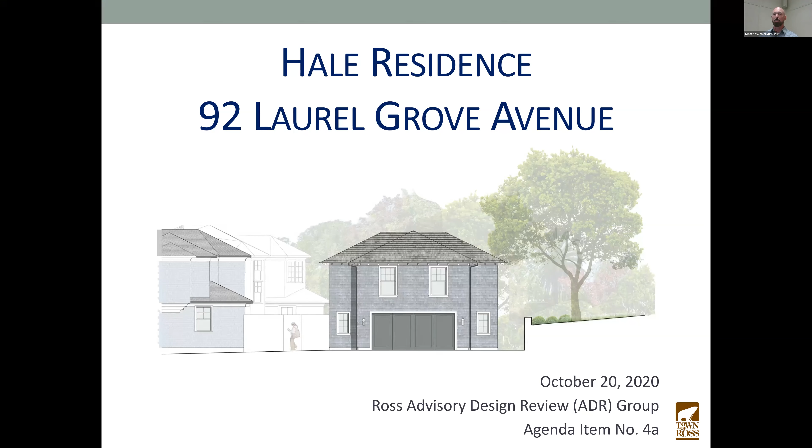The lot size is just over an acre in gross area. It should be noted that there is a road easement that occupies a portion of the western part of the property, so the developable area of the property is actually a little less than an acre. Also, one would note that there is a stream located along Laurel Grove Avenue, and so there are appropriate setbacks on the property for development from that stream.

Project history: in 1997, based on the town's records, a variance and design review was issued to make alterations and additions to the existing residence. And in 1998, an amendment to that project was approved.

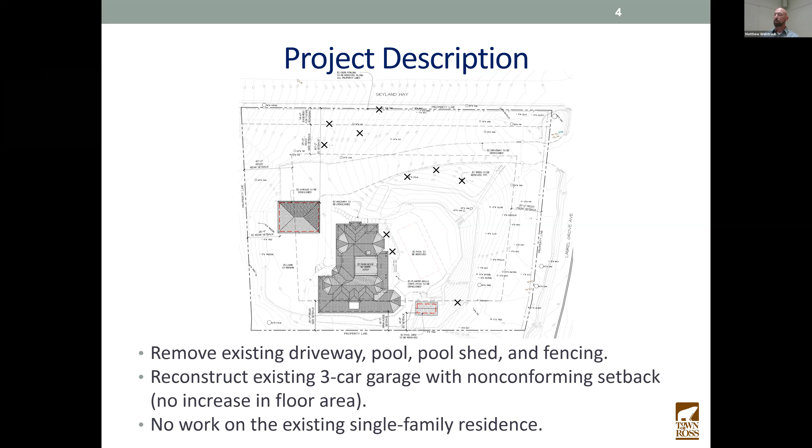The current project description, here we see the property with Laurel Grove Avenue on the right side and Skyland Way on the top. The current project preliminary activities would involve removing the existing driveway, the existing pool and pool shed, and the perimeter fencing around the property. Also, the project would reconstruct the existing 3-car garage, which has an existing non-conforming setback. There would be no work on the existing single-family residence.

The other major components of the project would be to construct a new 1-story, 800 square foot accessory dwelling unit along Skyland Way, occupying area that was the existing driveway. Also to construct a new 2nd-story ADU above the reconstructed 3-car garage, maintaining the existing non-conforming setback.

I should mention the setback for ADU number 2 is approximately 24 feet from the edge of the existing roadway, and about 18 feet from the edge of the property line. However, it would be about 4 feet from the road easement that is on the property, which currently has no plans to be developed.

What should the setback be on that side? The setback is 25 feet, side yard setback. The effective practical setback from the edge of roadway is actually 24 feet, so from the standpoint of physical distance to the roadway, it almost meets the minimum setback. The code, however, does require setbacks to be measured from the edge of easements, so technically this ADU would be located 4 feet from the edge of the easement line and within what would be considered the side setback.

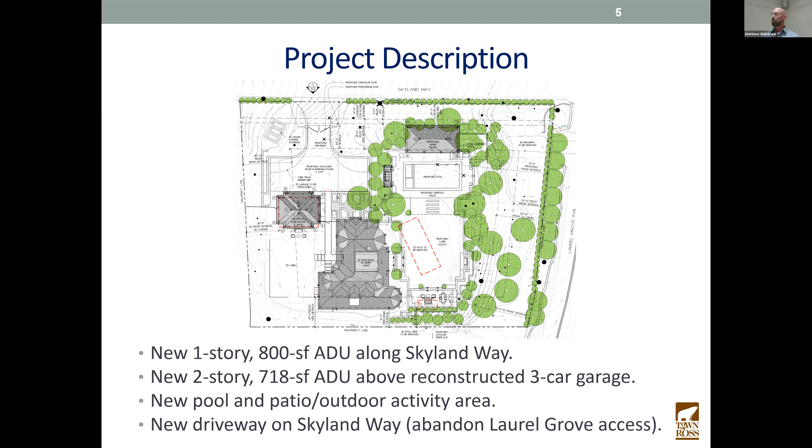Here are some representative building elevations for the garage and ADU on the left. The new garage door would accommodate 3 parking spots within that structure, and we see the entrances to the ADU here. The second ADU on the right side is a 1-story structure, but it should be noted it would be built on a grade, so it would actually exceed the maximum allowed building height of 16 feet.

So a variance would be requested to exceed the building height in approximately this location at the back of the building. Both ADUs would actually request exceptions for height.

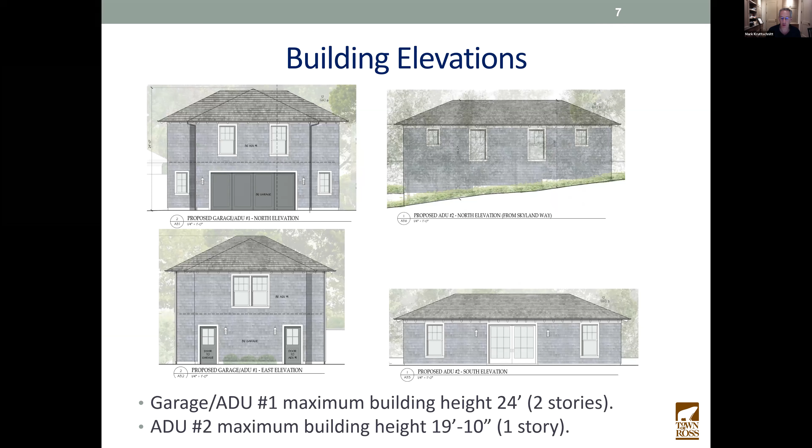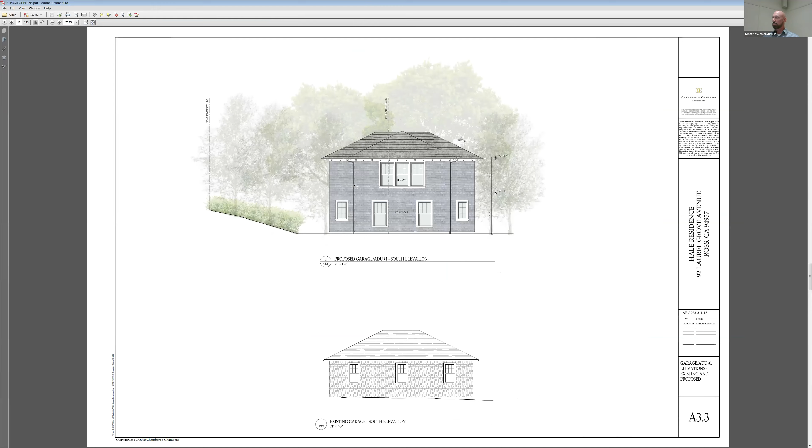Thank you, Matthew. Could you show us ADU number 2 from the east side? Sure, as you'd see it from Laurel Grove—since it's an uphill slope. Let me scroll through the plans. That one? No, the other one—it's the first one, because the pool's to the left when you see it from Laurel Grove. Go back to the last slide. That one, the east elevation. Yes, did you see the cut of the pool? Yes, that's from the interior of the property. Thank you, that's what I wanted to see.

Okay, we'll open it up now to the ADR members to ask questions of the applicants. I think before we hear from the applicant, I'd love to hear from Matthew about the findings for the variance from staff's perspective.

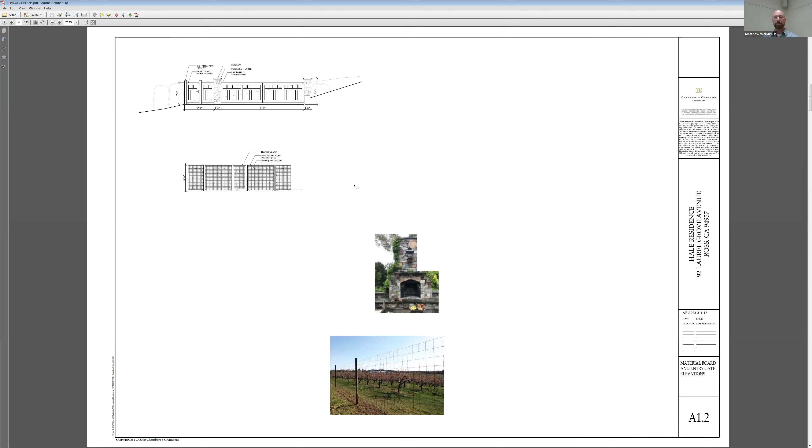Sure, I'd be happy to talk about preliminary findings. Staff has not developed full findings yet. There are actually two types of requests: ADU exceptions and variances. ADU exceptions are being requested to construct more than one, up to 2 ADUs on the property, and also to exceed the 16-foot one-story height limit for ADUs. The reasoning is that the property meets the minimum 1 acre lot size to be considered for more than one ADU, and construction of ADUs, and housing in general, is a priority for the town and the state of California. Those would be preliminary notes, not necessarily findings.

With regard to the variance request for the patio, one would note that the proposed patio is designed to align with the residence, so as not to be placed in an offset location where it might be awkward to leave the residence and go around a diagonal path to reach the patio. So from a design perspective, that would seem to be the reasoning.

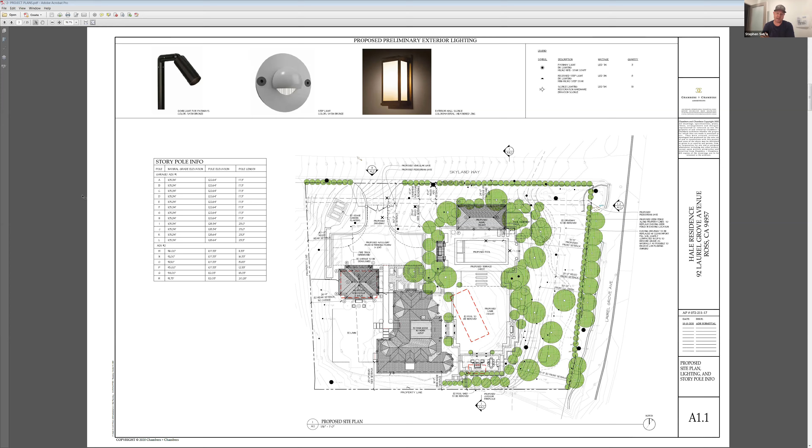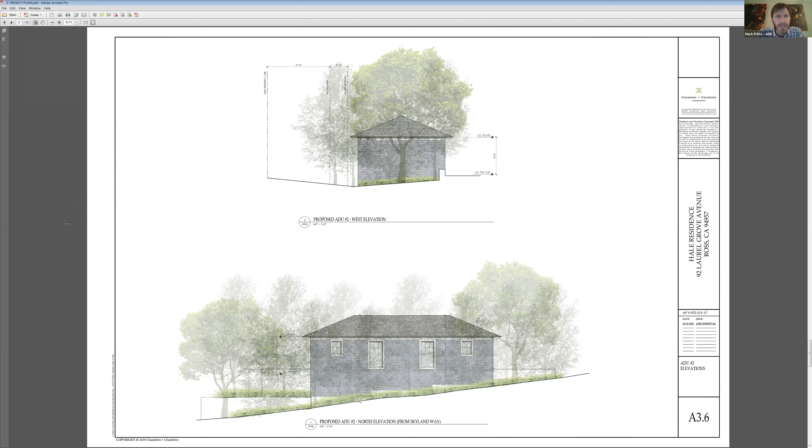I can jump in. I concur with the previous comments around the bulk and mass location of the ADU on the existing driveway. Pulling that in seems to be, you could wipe out a few variances all at once by doing that, and eliminating the presence of that unit so close to the road.

I would say the articulation used on the garage, I'm assuming you're knocking the garage down and rebuilding it as a 2-story. That articulation, some of that language, some of that character could be carried over to that other unit to articulate the backside, at least make it a bulk and mass that is broken down in scale a little more.

But I think scooting it back away from the road eliminates the need for a height variance, in addition to violating the setback variance with the easement.

I would say I am a fan of moving the drive. I think that's just to throw it out there as a support. I think the access from Skyland seems good. It's in concert with other driveways that are accessed as well. And then you eliminate such a long drive on the property. So I think that's a smart move, really, really nice.

And I think I get the symmetry and the location of that patio in what I would characterize as the south setback. I just think it's hard to make findings for something that is, on your almost an acre lot, putting a patio so close to the property line. It's just, it seems unnecessary.

I would have difficulty making findings for that, other than the symmetry, which I think there are probably a variety of ways to satisfy that from a building relationship to that patio. So pull that in, get that out of the setback. Again, it's a nice move architecturally, but I think it's unnecessary to have that variance included in that as well. I think the other comments I support from Mark and Joey.

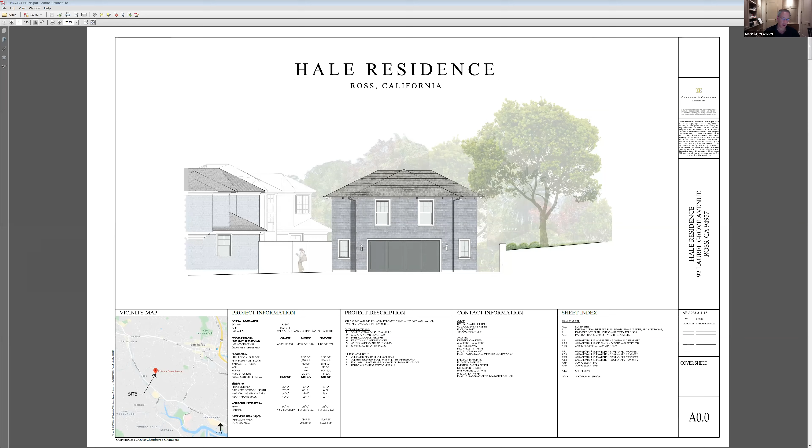Okay, thank you all. We will now move on to the Dickerson residence at 105 Bolinas Avenue.

Yes, thank you, Chair and ADR group members. Please give me just a moment to start my presentation. Apologize for the video gymnastics.

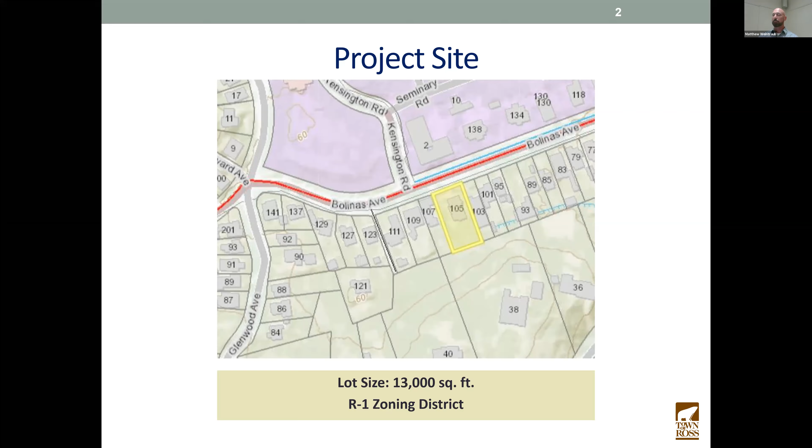The Dickerson residence is 105 Bolinas Avenue. The owners are Roger and Melissa Dickerson, and the applicant is Imprints Landscape Architecture. The property is 13,000 square feet in size, located on the south side of Bolinas Avenue in the R1 zoning district, relatively flat lot located out of the flood zone.

Project history: in 1998, the existing residence was constructed. In 1999 and 2000, there were alterations granted to that existing residence. And in 2001, a variance was issued to do landscape and hardscape work in the west side yard setback area.

That brings us to current day project description, which does involve the west side yard setback area, which is proposed now to receive a new combination pool and spa and associated patio. The pool, spa, and edge of hardscape would be located approximately 10 feet from the side property line. There would be new screening trees located along that side property line, as well as along the rear property line, where an existing hot tub is proposed to be removed as part of the project.

The project also includes a new pool equipment enclosure designed to match the existing wood fence, which is behind the front property line adjacent to the house. The pool enclosure would be located actually behind the fence, so it'd be screened from public view.

Colors and materials: quality hardscape and flagstone materials and plant materials are proposed, including large 24-inch screening trees. Public comments were received from Trevor Buck at 83 Bolinas Avenue, who is in support of the project. I'd also note that the applicant's neighborhood outreach description describes that Rich Petrello, the adjacent neighbor at 107 Bolinas Avenue, indicated he supported the project. So he would be the owner who's adjacent to the setback encroachment.

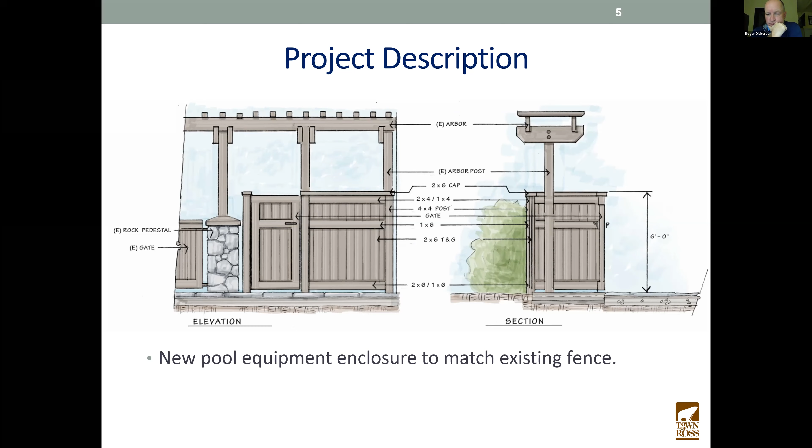Stephen, do you want to be the second person to give a yay or nay vote? Sure, I will say yes.

If you want a little more color on that, I think that these tight houses on Bolinas and parts of Poplar just don't conform by any stretch to kind of the setback standards in a way that really allows for enough patio function, enough pool function. I think it's appropriate to confine the house there, but I feel like the neighborhood kind of accepts the tight conditions and the noise that comes from family life. So I think whether you put it in the backyard, the side yard, everyone's going to hear it all the time anyway, kind of, you know.

I said yes to one on Poplar and everyone else said no and got mad at me, but I'm saying yes again. Okay, thank you, Stephen. Mark?

You're on mute, Mark. Yeah, that's why. I kind of side with Joey on this. I'm just not sure, I don't think it's an appropriate spot in this particular development. I know I would hate to lose some redwoods in that particular grove back there, but I think that might actually be a better solution for this particular project. It doesn't, when you walk in, it immediately feels like it's in an odd spot for this particular lot.

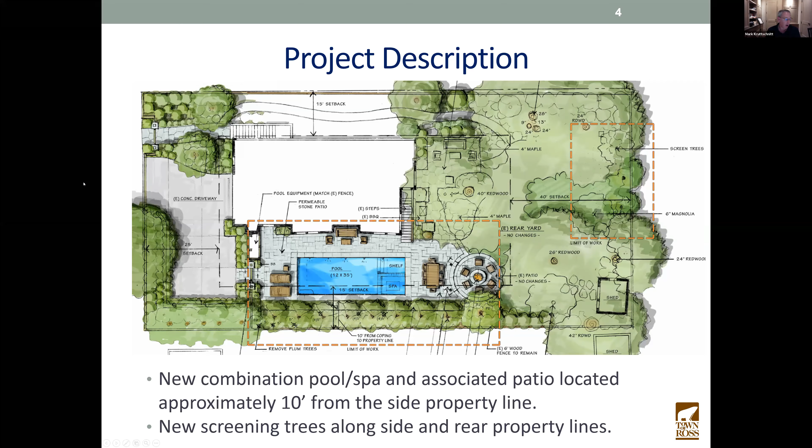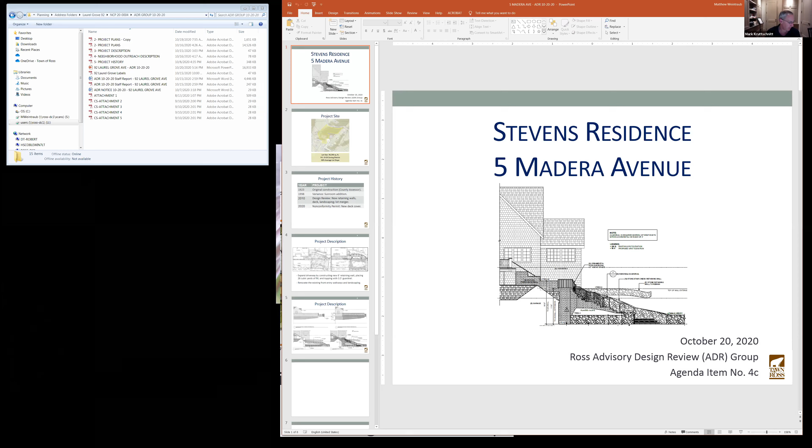Okay, 5 Madera Avenue, which we've already looked at before. This is just an addition or a change in the driveway to a house project that we approved relatively recently.

Yes, thank you, Chair Kruttschnitt, ADR group members. The project before you is the Stevens residence at 5 Madera Avenue. Yes, you did see the project at this location a few months ago. The project was a new deck cover over an existing deck. This project is related to the entry landscaping and hardscaping.

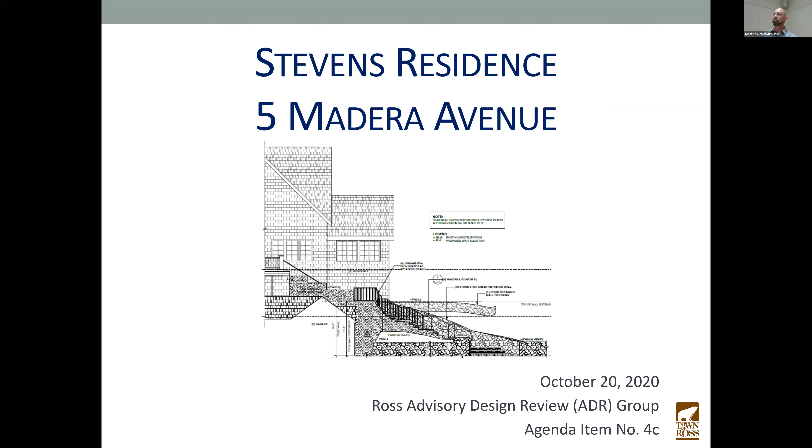The owners are Ann and Chuck Stevens, and the applicant is Peterson Associates. The project site is located between Baywood Avenue and Madera Avenue, an irregular shaped lot, a little less than an acre in size.

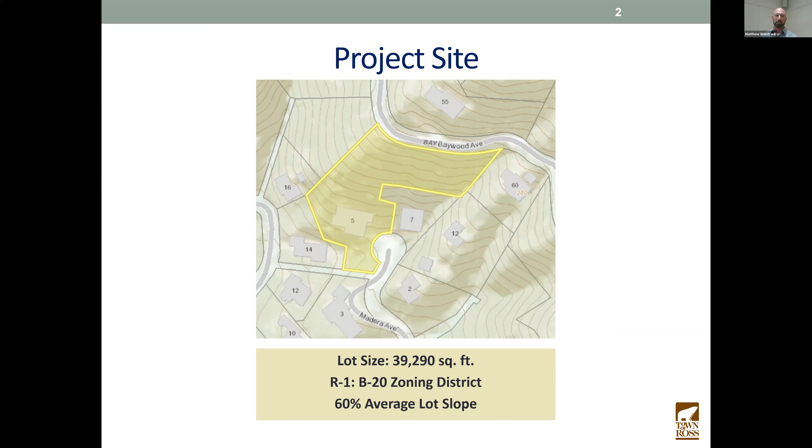The predominant characteristic is the 60% average lot slope, and the existing house is developed at the bottom of the slope. That's an existing condition the property owner is dealing with in their current plans to renovate the entry.

Project history: the original construction, according to the county assessor, was 1923. In 1998, a variance was issued for a sunroom addition. In 2010, some landscape work including a lot merger resulting in the existing irregular lot shape. And in 2020, just a few months ago, the nonconformity permit was issued and approved for the new deck cover.

The project description is shown here with the existing site plan on the left and the proposed site plan on the right. The proposal is to expand the existing driveway by constructing a new 6-foot retaining wall and placing 26 cubic yards of fill behind that retaining wall, then extending the driveway over the top, and topping it on the edge with a 3.5 foot guardrail.

In plan view, this is the existing edge of the driveway with a wall located here, and a small wood deck that extends out. The proposal is to remove the cantilevered wood deck and extend the paved driveway into this location shown on the right. This area is where the fill would be located, and the 6-foot retaining wall runs right along this edge.

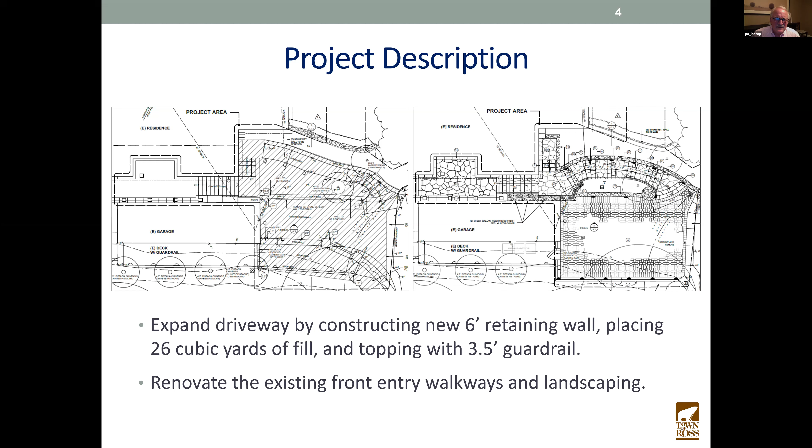So I guess my only thought was with that retaining wall, is that I understand there'll be some planting on it. Is that something that's visible from the neighbor's property at all? I would say you'd probably have to stand on a chair to see it, because that home is down in a pocket quite a bit below this. But no, we're planting it, so it will be softened.

Great. Okay. Yeah, I'm in support of all of the work. Thank you. So Matthew, we're unanimously in support of the proposal.

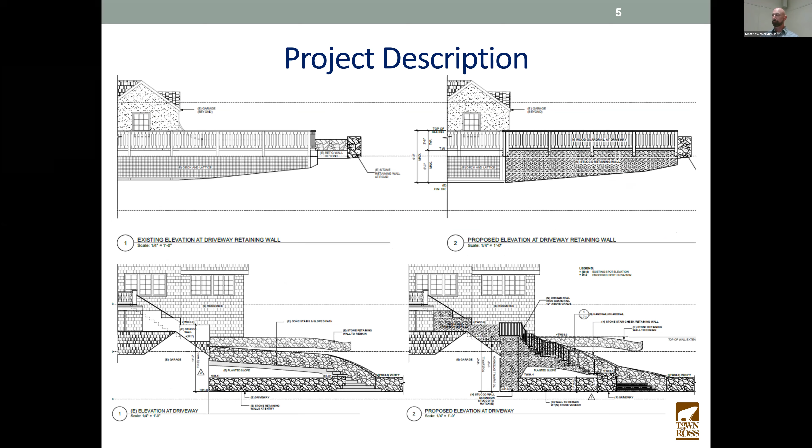Thank you. Great. Okay, now we will have a rare conceptual advisory design review of 3 Newell Road, the Murray and Jurek. Sorry, I'm not pronouncing that right. I pronounced it right one time though, I'm sure. Saying it both ways.

Brad, are you going to be presenting this? Well, I think... Or Ken, there you are. Hi, Ken. Sorry, I can't come up. I'm joining for fun. And Chair, if you don't mind, I'll just give a brief introduction on what conceptual design review is, and then I'll hand it over to the project team.

Essentially, this is not a project that we have a formal application for at this time. This is something that's been discussed with staff in concept, and the applicant would like to take advantage of the fact that we do have this advisory design body while they're early on and haven't invested too many resources into the design of the project yet, to bring the concept in front of this group. This is a workshop to gather feedback from the advisory design review group. So as opposed to making a recommendation or saying whether or not you'd support this moving forward to council, this is the opportunity to just apply your talents and skills to work with the applicant on making sure that this project, when it does come in for application to the town, is already on a good footing, and it's got the concepts of good design that you'll be looking for when you are making a decision on the project down the road.

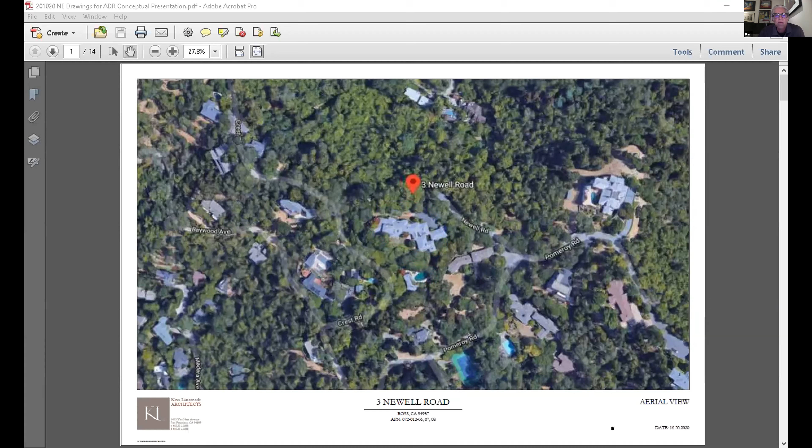Let's go to the next slide. It's this kind of low-slung, one-story house that meanders across the property. There's a plateau at the top of the ridge, with great views of Tam, surrounded by trees.

There's a feel to this place that my clients really love, and they want to retain the spirit of what's there. But the fact is, to try to remodel this place and bring it up to today's codes, oftentimes we just need to take these houses down if we can.

But we want to retain a lot of the site elements that are there. The pool house at the bottom of the property we want to keep. So the big thing I'd love for you guys to opine on is just how we're handling the site.

I'm not really going to go into architecture today since I don't have exterior elevations, but I feel the biggest part of this project is how do we site the property, how do we site the buildings, and what are our primary access points. So let's go to the next one.

This might not be easy, but let's see. This is Newell Road. There's a driveway that heads up to the north here, and this is where the cars park, right in this area. You're seeing the whole outline of the property there.

Right along the ridge, the house kind of occupies more of an east-west orientation. There's this oval pool down below and a pool house, and a really cool stone walkway that leads you down to the pool. There's a bit of lawn space here, and all the views to Tam are kind of that way.

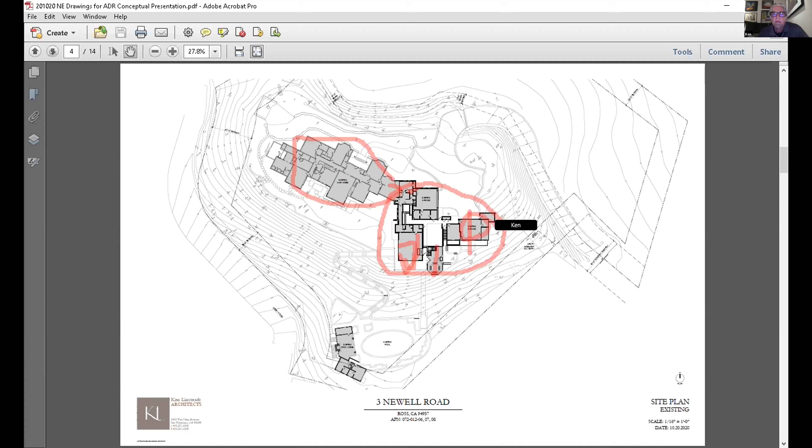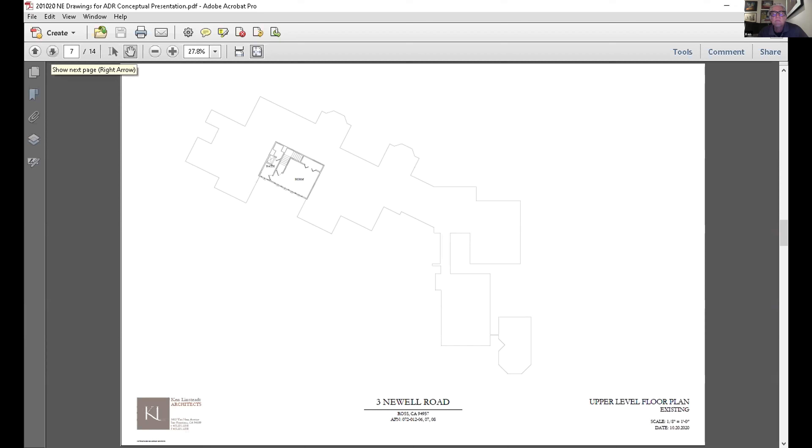Let's go to the next one. There is a second story that somebody added. Let's go back one more. Somebody added a second story to this existing one-story wing, probably back in the 70s or 80s.

So maybe can we zoom in a little bit, Jessica?

In red, we're showing the outline of the existing house. I'd say the big moves here are creating a drive court that you can actually turn a fire truck around in, because the current one doesn't accommodate one. So the shape of this arrival court is really all about what's going to accommodate the Hammerhead T. We brought out Rob Bastian from the fire department to take a look at this property, just to make sure we're doing the right things with fire. He had some recommendations we can go through, but this seemed like the right call.

We took the garage and pulled it over here to the east. So really we have a primary entry now straight on. This is a one-story structure fairly close to where the existing one-story structure is. And then we have a breezeway over here that leads to a two-story structure in this area, which is the bedroom wing.

So the big idea here was let's keep a low slung one-story gabled form essentially in the same spot that the current house is in, and then remove all of this and move it back, because at the north end of the property there's just a bunch of trees and it falls off quickly. So we thought, let's move this structure back and allow a big meadow garden space here that the clients would really love to have.

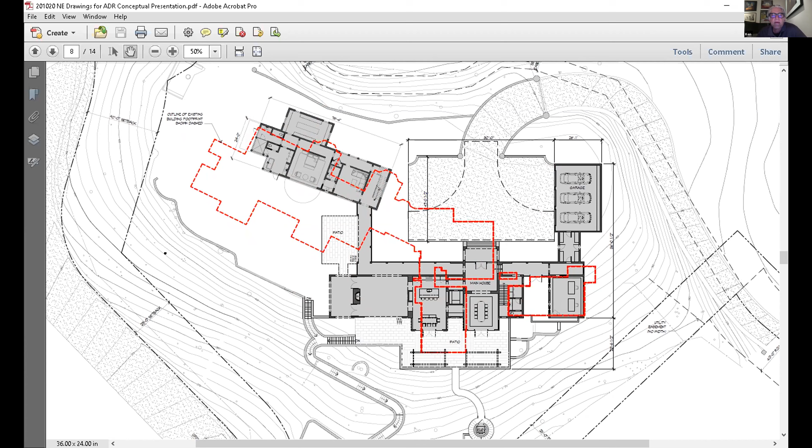Oops, is there a— let's see if we can find a downstairs of the existing.

Yeah, so basically we've created this big deck off of the back of the main structure. And this is where we're getting some downstairs space, which is going to be kind of a rec room and a gym. So we're stepping down the hill.

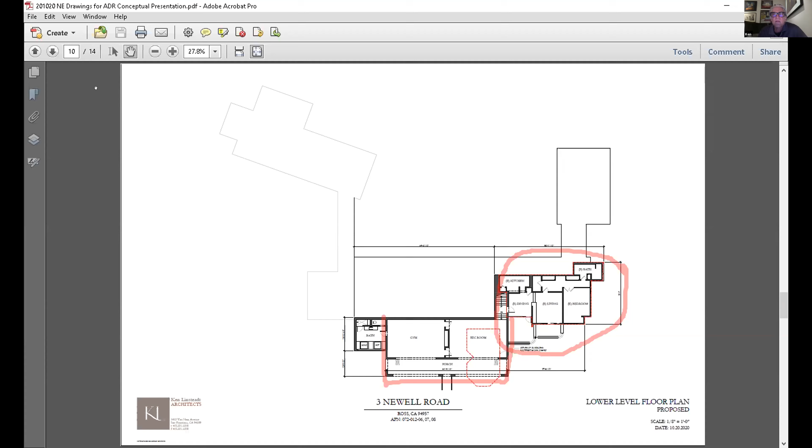And I thought it would be kind of interesting to see if we could keep this original guest house that was done in the 90s, because there's so much structure to it and there's these big stone retaining walls. I thought, if we can just spruce this up and make better use of it, it would be nice not to just tear this whole thing down and start over. So what you see right there is the existing location of a guest suite.

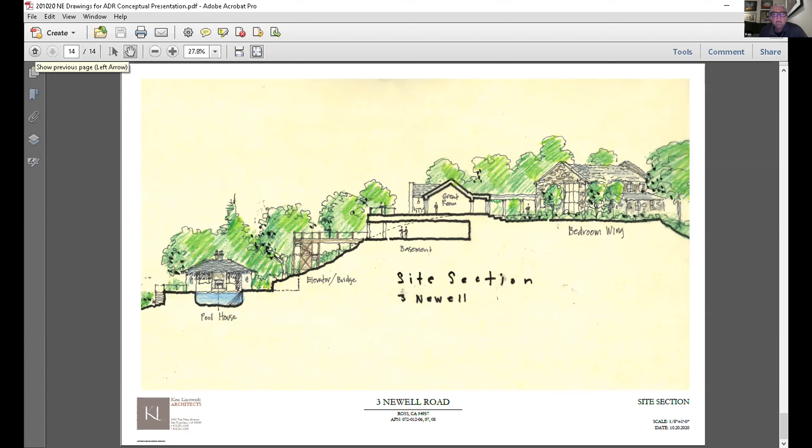So maybe we should go to the landscape plan. Janelle Hobart is here, who did the landscape, and maybe she can speak a little bit to what we're doing with the gardens. Hi. I don't know if I'm on camera or not.

So the concept for the landscape is to embed the house in a native hillside landscape. There's a lot of sloping areas around the house, and there's a lot of Algerian ivy currently, so we're trying to replace that with more native appropriate planting, and kind of contain the garden around the courtyard, around the entry court, out the windows of the main house, but try to join the landscape with the views of Tam and the surrounding native Marin landscape.

And this accentuates some special trees and places that don't block the view. And then rework the circulation a little bit down to the pool and around the property in general, so they can circumambulate the whole property.

Any questions? I have one, Janelle. I'm very curious about the WUI regulations and all of the fire concerns we have, if that is impacting the types of plants you're picking, in terms of having to pick a whole palette of non-flammable planting. What would that change about the landscape you might have done, and what you would be doing for a house like this up on a crest?

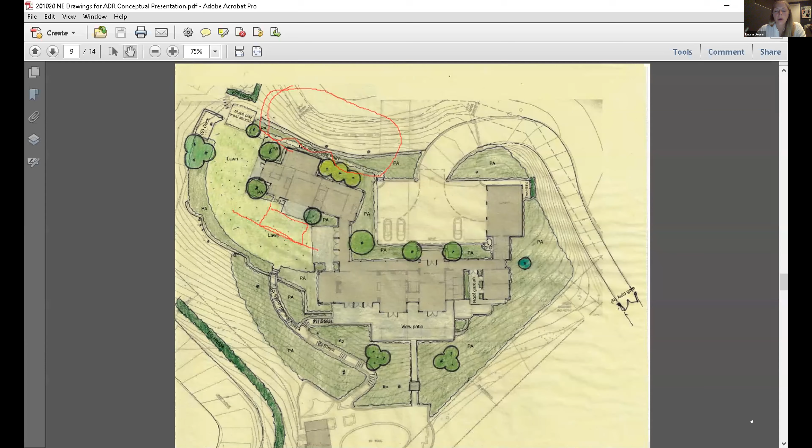So maybe the question would be, and I wasn't able to walk over there, but if further up Pomeroy, like 5 Pomeroy or any of those houses would have sightlines now of the small 2nd story that's there, and how pushing it back further northeast makes sense for the lawn. My feeling is there is not one person that can see this house, even with this 2-story, and we just have to demonstrate that in the next presentation.

So Ken, what would be a really good idea is to have the fire department come out proactively and mark the trees - I'm pointing to it on my screen here - where the contour lines are very tight, and identify for us how many... yes, you got it, that's what I'm talking about.

How many trees are going away, because that surprised us on a previous project where there was a very steep facade and it seemed fine because there were a ton of trees in front of it, and then the fire department made us take them all out. So just get them out there before our review and have them tell you what they're going to make you take out.

Yeah, so one of the feedback items we got from them was that they're going to be looking for a commercial grade sprinkler system up there, which I thought was interesting. That hasn't been a condition before, but I kind of get it - I think that probably makes sense up there.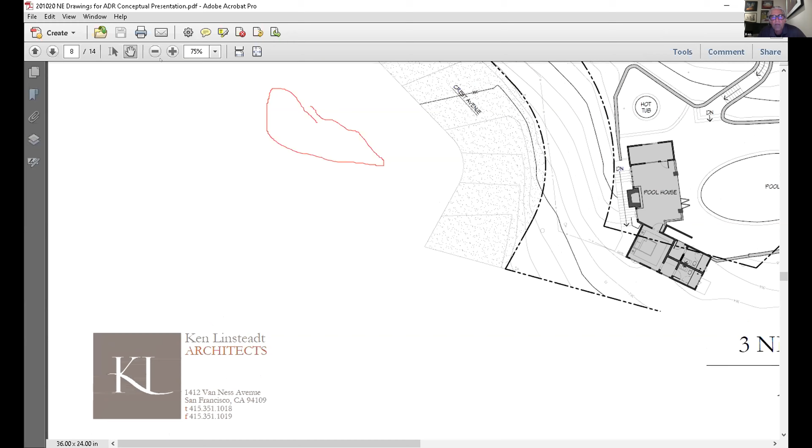Is there any requirement to have a water tank in addition to the commercial sprinkler system? I've heard that on occasion. So that's a good point. Maybe pull up the survey. There is a pretty big water tank on this property that really is there for irrigation. There's two wells and a water tank.

It's labeled down there, it's by the hot tub. Is that the one? It's right there. And that is actually probably a great source of fighting fires when it comes to it, and the pool below. But yeah, that does exist. And they just put in a fire hydrant in the driveway as well about a year ago.

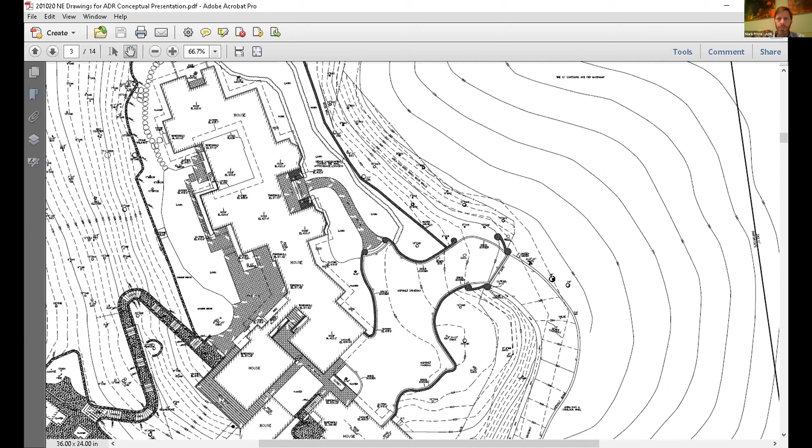Yeah, you mean right there? I think so. Back to the house too, maybe just to chime in from a site perspective, there's probably close to an acre or so behind the house. So even if you took out all the trees at that level, down here, it's a whole forest back there all the way down to the property line.

And the visibility thing is like, I'd have to go down into San Rafael somewhere and try to figure out how to find this hill. There may be some clearing near the house, but given that entire forest there, I don't think it's going to have an impact. But what Steven said is right, if you're right at the top, it can kind of poke up and be in daylight. So we got to look at that.

That should be one of your main concerns, just from what we've seen before, because even if we like the architecture, if all of a sudden you can see it from everywhere, sometimes a town is very reluctant to approve something on top of a hill. Got it, and there's a whole bunch of county ridgeline ordinances as well. I don't know if those ever figure into it, but I'm sure you can look those up and confirm it's all okay.

And I think they're also pretty focused on being fireproof. So our materials are going to be, it's not going to be shingles, it's not going to be wood. We're probably looking at a mixture of stone and stucco and probably metal roofs or slate roofs, one of the two. I would build fireproof if I were building. Yep, I get it.

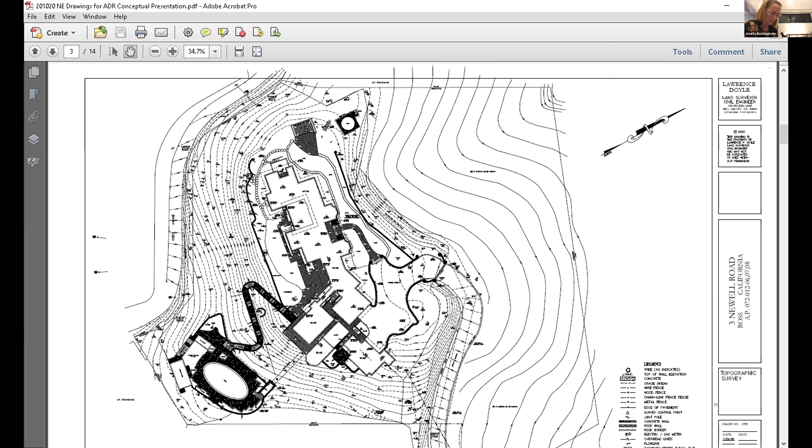I just met quickly Brad and Lynn out there today. I unfortunately surprised them, but I had a quick jog around the property. And the one thing I did mention to them, if they don't want this right now, but it's more of a client happiness thing for the future, is I personally think you should identify a pool site up at the level of the house now, even if they never build it or don't want it now, because that may be something they want later. And I would support pushing that residential wing as far back as you need to, given that there's such a steep drop off and all the trees and everything we've discussed there.

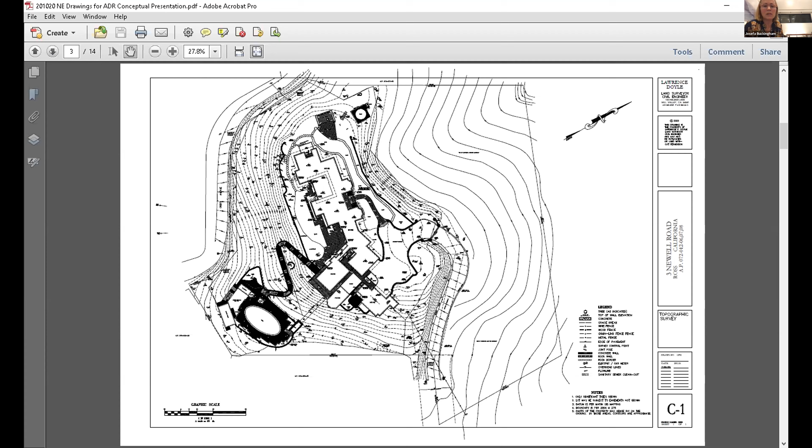I just thought it might be something you think about, that someday they may want a pool up by the house. But other than that, I think it's an excellent reimagination of this property, and I would just push as much of it back toward the driveway as possible and give yourself the open space toward the view. Are you saying that when they get old? Well, I actually knew the Maddens who lived there before, and the pool way down there, that's why they built that funicular. It's not that convenient. It's kind of fun now.

I understand how Lynn and Brad feel having little kids - they'd rather have the pool out of sight, away where it's a special trip to go there. But having had teenagers, there will come a day where it's fun to have it up by the house. So I think it's great to imagine these things, plumb for them, put the gas line there, and have it ready to roll if you ever want to do that.

It's not really an ADR comment, it's more like if I had this house. Okay, thank you. Thanks, Joey.

I'll finish up my comments. I think it's a nice siting. I always toss in, do what you can for either solar or some version of renewables in a home like this from scratch. Always like to see that. For sure, as much as possible.

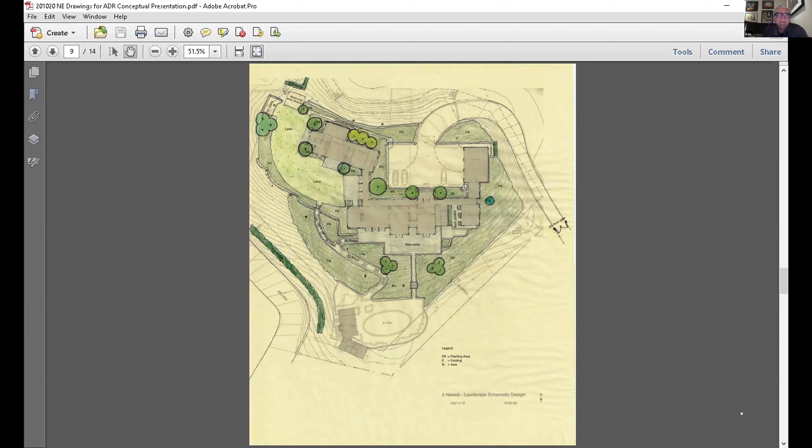Okay, is there any staff communication we need to do, Patrick? Not too much. I'll just mention if you've been downtown recently, you may have noticed that Crown and Crumpet is open now and they've built a parklet in front of their business, which is the first one we have in Ross. Especially nowadays, you're seeing them all over the place as businesses try to take advantage of outdoor space as much as possible.

We also installed 3 new park benches on the side of the common closest to Redwood, and we did reach out to a couple ADR group members at random for comments on the design of that location. So we thank you for that feedback. They've been getting heavy usage, just from general observation during the day.

And especially this weekend, we closed Redwood and opened it up, put in a bunch of tables, invited community members downtown to take advantage of the downtown and the nice weather, the clear air that's become so uncommon recently. It was a great event, very well attended both Friday and Saturday night. What I'm hearing from the businesses is that they did gangbusters. So we will likely look for other opportunities to do something like that and take advantage of the condensed downtown we have and the ability to close the street to traffic and invite people outside. That'll be once in a while when we can do that, but the tables are there permanently and they're getting great use.